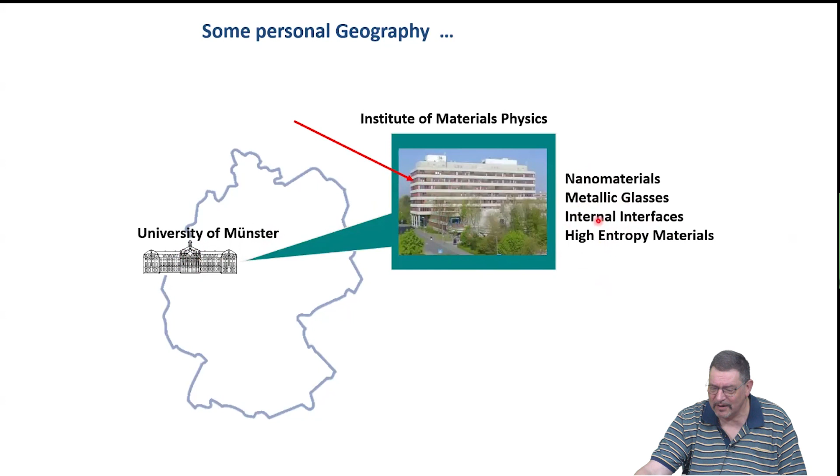And what we do is we are interested in nanomaterials, metallic glasses, internal interfaces, obviously high entropy materials, and then also internal interfaces in high entropy materials. And we also are part of the Center of Nanotechnology, a separate building where we do surface nanostructuring. Also partly related to these materials here, but partly also related to other topics like sensing or light harvesting, which we also do in my group.

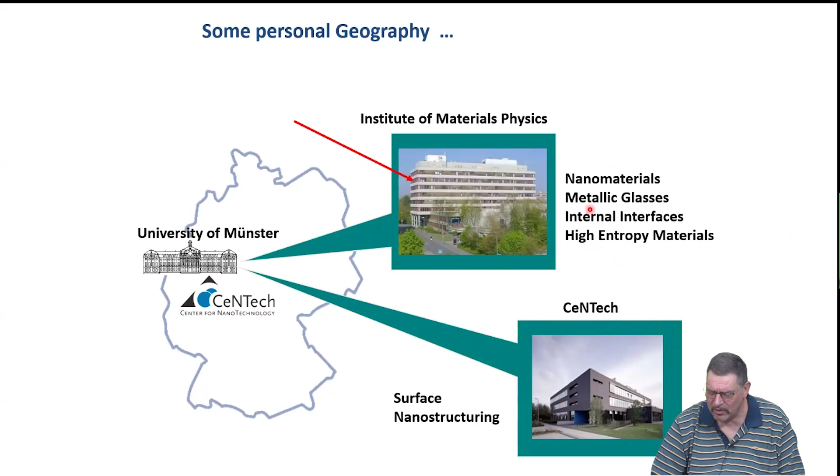And you could ask, how is this possible? Who pays for it? And nicely, the Beilstein Institute, which is a charity foundation founded 60, 70 years ago by the German chemical industries as well as the Max Planck Society, has put down money at that time. This is still kept, and from the interest of this money, the whole publication thing works. And yes, I think we were one of the first doing diamond open access so that nobody really has to pay.

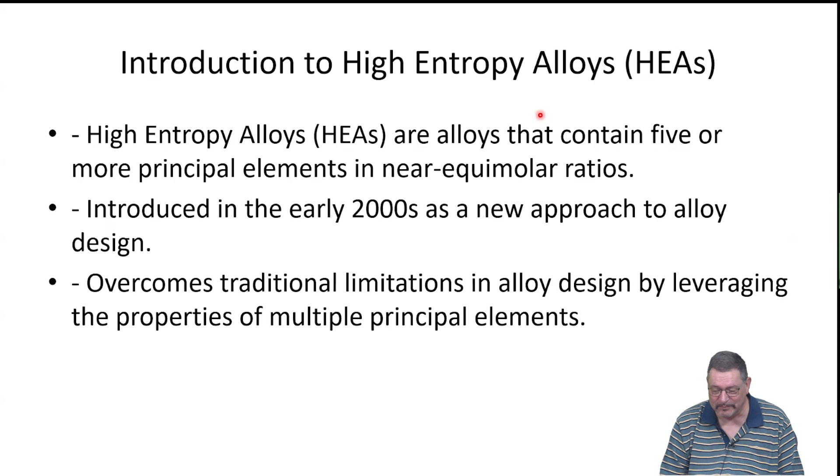But there were early concepts and ideas, and normally people say that in the 1950s to 90s precursor ideas were formulated. They started with binary, ternary, quaternary alloys. Most importantly, the theoretical groundwork for multi-component systems was established, and this has gone into CALPHAD, right? This is what people mean by that.

It was not a systematic approach, so we don't call it science what he did as of today, but these ideas were around for quite a long time. Challenges are you can hardly predict phase stability without a computer, and also mechanical properties would be very difficult to put, and the computational tools for high-dimensional phase diagrams were limited and still are limited.

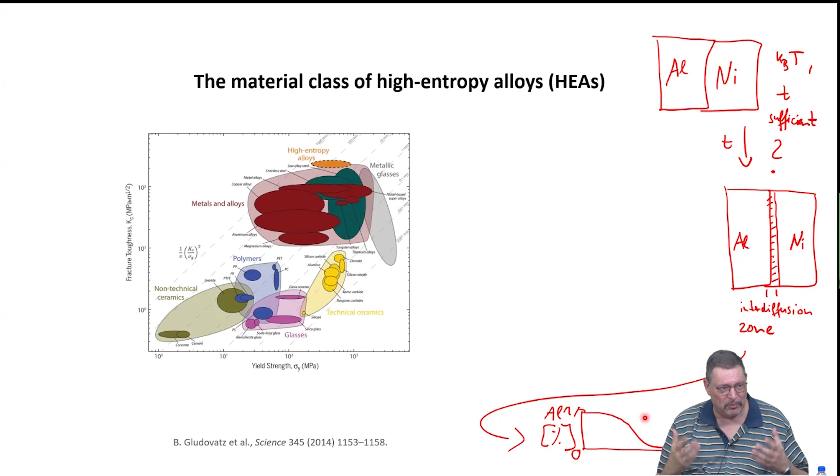So, microstructure of materials. I gather that all of you know about how to characterize, right? So you do optical microscopy or you do scanning electron microscopy, and you see different contrast arising from different optical properties, interactions, as well as different orientations. And I have to say, most of the high entropy systems have a microstructure that looks rather normal. So you have grains, grain boundaries. If you have two phases and you have a compositionally complex alloy, you have phase contrast, but there is not much more to it on this level.

We will see later on that if you go to the transmission electron microscopy level, TEM, things might be different, because the defects of the crystal structure, dislocations, twin boundaries, and so on, are normally found in higher abundance in metallic high entropy alloys than in conventional alloys. So these systems can retain high defect densities to much higher temperatures over longer times. And this is giving you an additional set screw, because normally we use defects to engineer materials properties, right? And this is exactly what is happening here, even though it is not really recognized in the literature. So they can store defects much better than conventional materials.

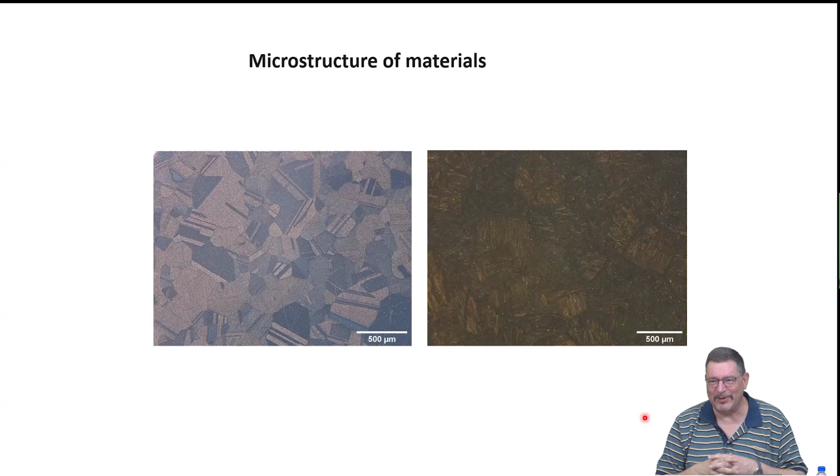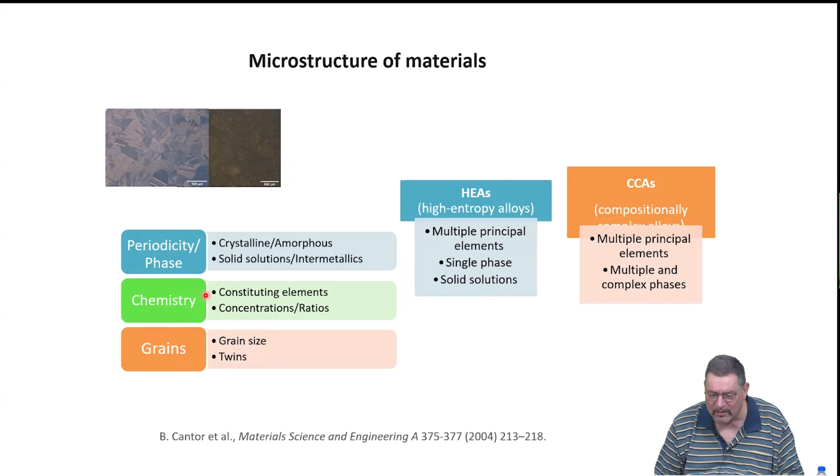Obviously, when we think of microstructures, we have to think of not only the phases that are visible, but also look at defects, as we just discussed, and then also chemistry. And chemistry is what has mostly been discussed: which compositions can we really use to make these high entropy systems? And I'm using high entropy systems now as a term for all these materials, whether they are compositionally complex systems with more than one phase or high entropy systems, just to keep it simple. But as you know, the distinction is there.

In 2004, the high entropy alloy concept was really born, and it was pioneered by our colleague from Taiwan, Professor Yeh. He also published the first really landmark paper, which is very highly cited, on high entropy stabilizing the single phase solid solution. Let me just see if you guys still remember the basic thermodynamics which you were taught. What do they mean with this term high entropy? Or where does the entropy come from? Excuse me? Yes, very good. Are there different types of entropy? Magnetic, electronic, there's all kinds of entropies. They are just talking about configuration, right?

Very good. Why is high entropy, and also high configurational entropy, stabilizing a single phase solid solution? Exactly, right? Because we have this term, and this rules, right? So if we want to have a low Gibbs free energy, then it is helpful to have a high entropy term, and the configurational entropy is part of the entropy term. And so if you increase that, then you decrease G. And so in this competition between different phases that can be stable, the solid solution phase has an advantage if there is a high configurational entropy. And then it was shown that high entropy favors simple solid solutions.

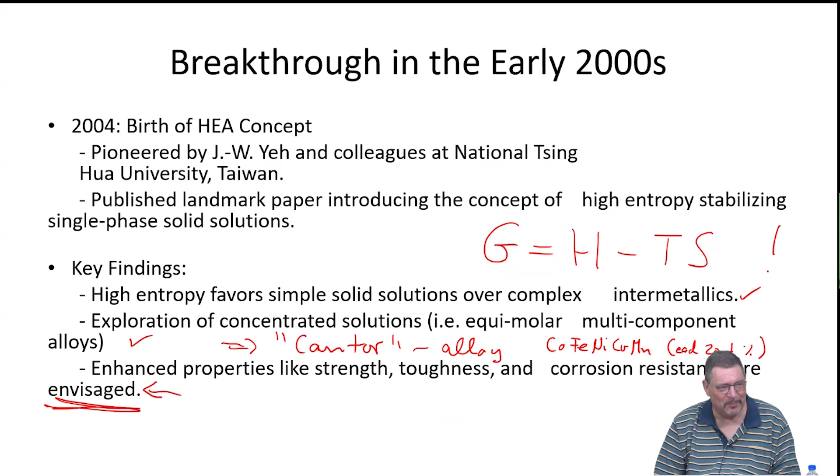All these enhanced properties are suggested. We don't know yet in many cases if they are there. So a lot of research by young people needs to be done in order to find out. Yeah, this is really the concept, right? We have different elements, and this also already shows you that you have to now think of something like

how to display phase equilibria, because from binary systems we are used to having a sheet of paper, A, B, and then you see the phase diagram. For ternaries we get different cuts through the prism, which is the phase diagram, but going to a higher and higher number of constituents, it gets more and more complex, and we don't want to walk around carrying some object.

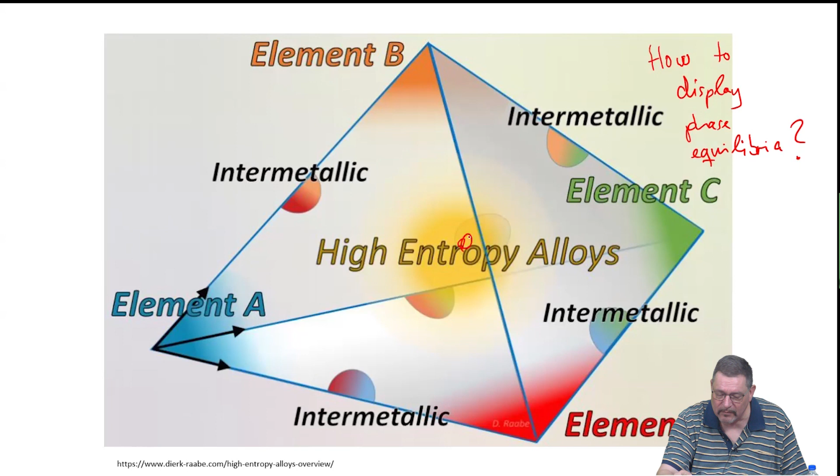So we have to think of, and this we do down the road, how to really design concepts to show phase equilibria with multiple constituents and maybe also more than one phase present at certain temperatures, compositions, maybe even pressures. The point is really that we go here to the center of the multidimensional phase diagram with our approach.

You could see it's a single phase solid solution, and it has these very good properties. I would say actually it still has probably better properties than many of the high entropy derivatives adding more elements, because the cobalt, chromium, nickel, or the iron, cobalt, chromium, nickel, the quaternary without the manganese, is a fantastic engineering alloy. It has really very high fracture toughness, very high strength, and it has a microstructure you can design at will, almost.

So it means that if one thinks about the properties in terms of real world applications, I would say skip the manganese, right? Use this multi-principal element approach, but I would say the high entropy concept is not more important than looking really at performance properties, cost, value, lifetime, cycle lifetime. And so this is something one also needs to keep in mind.

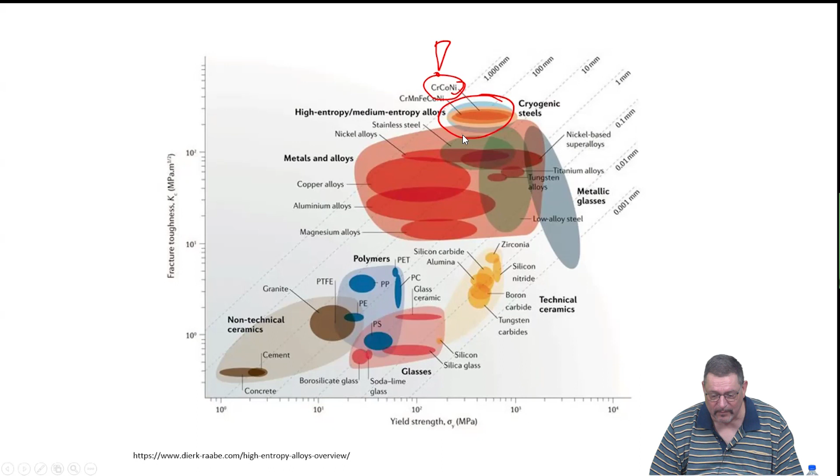It's nice to have this new paradigm of how to make materials, but one should not be blind and say, oh, it must be 5 or more components. If 4 is enough, it's better. It saves money, it saves time, you know more what you do. And this 4-component system really is a fantastic engineering material. Yeah, and then you know that you have to basically think of many materials which have been done over the years.

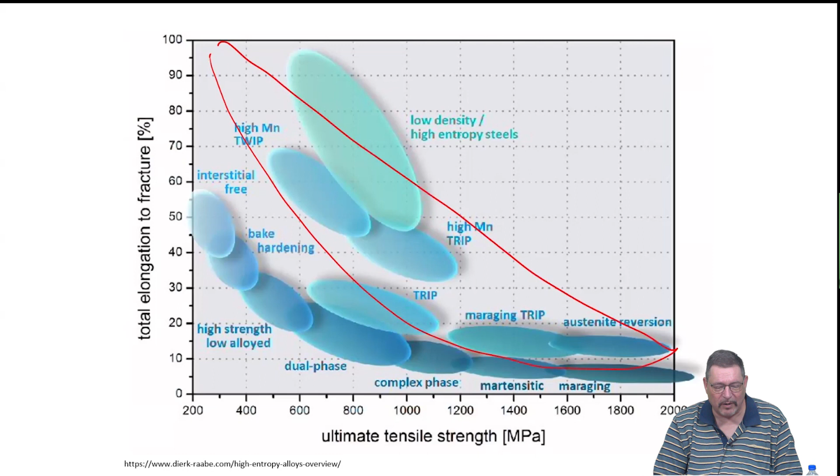As I said, steel is a very good material, right? So you get very high ultimate tensile strength materials, and total elongation to fracture always follows what is called the banana curve. So if you want to have a very high strength, you probably have to compromise with elongation to fracture and vice versa. And obviously, the Holy Grail is going in this direction, right? So you want to really expand into the region where high strength and high elongation to fracture is happening.

And in some cases you can see that high entropy systems, for example, also steels with a high number of constituents, they all have a high number of constituents, but a high number of constituents at rather high molar fractions can do the trick. So I would call them, in parentheses, high entropy steels.

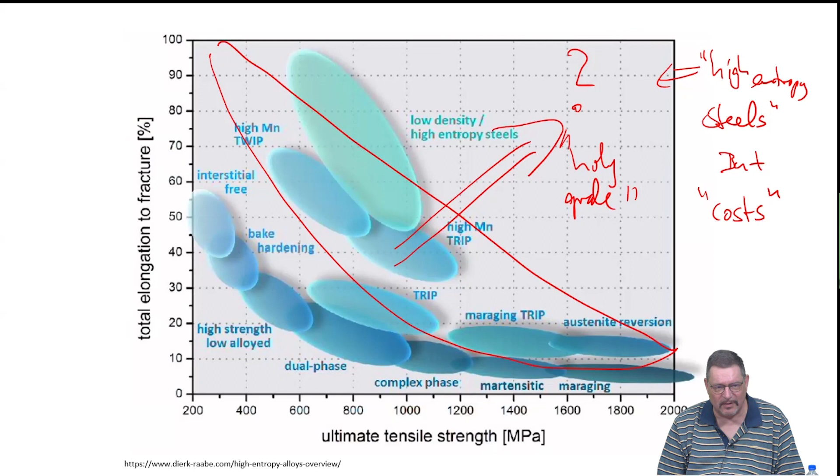They are not following really the definition of equimolar constituents, but some number of components have high ratios. But costs. I mean, steel needs to be cheap in industry. This is number 1, 2, and 3 priorities. And so once you add cobalt or nickel or vanadium or so, you're out. So nice concept, but in reality and practice, it's not feasible, because industry will not be able to cope.

So this is obviously high configurational entropy, which promotes formation of solid solutions over intermetallic phases. I would question mark this. Why do I question mark this? Because intermetallic phases often have very high enthalpies of formation. And so you need to have a very large term, T temperature times S entropy, to beat the formation enthalpy of intermetallic phases. Temperature is limited by the melting temperature, so you cannot go higher than the melting temperature, then you will not have a crystalline phase.

And configurational entropy is limited by how many constituents you can mix at rather equal proportion. At some point you run out of elements, so it's maybe 6 or 7 or 8, but then you will probably precipitate out a second phase, and then you can no longer calculate the mixing entropy in the same way if you have a new phase. Then you have to do it for each phase separately, so the entropy will go down. One thing I wanted to say, I forgot now.

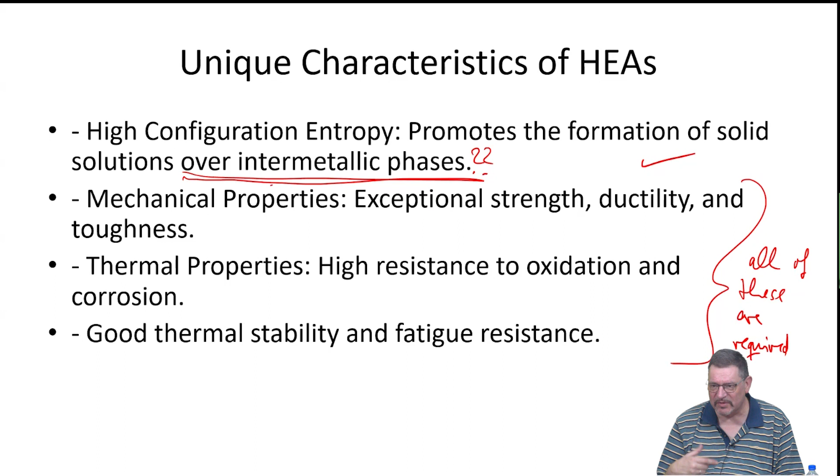And this is, I think, where high entropy systems are currently at in terms of the state of research, that you can really now start doing research on finding appropriate materials which can be called engineering materials so that they can be applied. Because so far most of the literature was really on basic knowledge about how processes work in high entropy systems as compared to conventional alloys.

When you think of it, lattice distortions is all you need, right? Because when you think of any material property, you can always break it down in terms of applying quantum mechanics to the distance of atoms and the strength of the interatomic interaction potential. Whether it's a magnetic property, electronic property, mechanical property, in the end, it will rely on how two atoms which are close together attract each other and repel each other if they come too close.

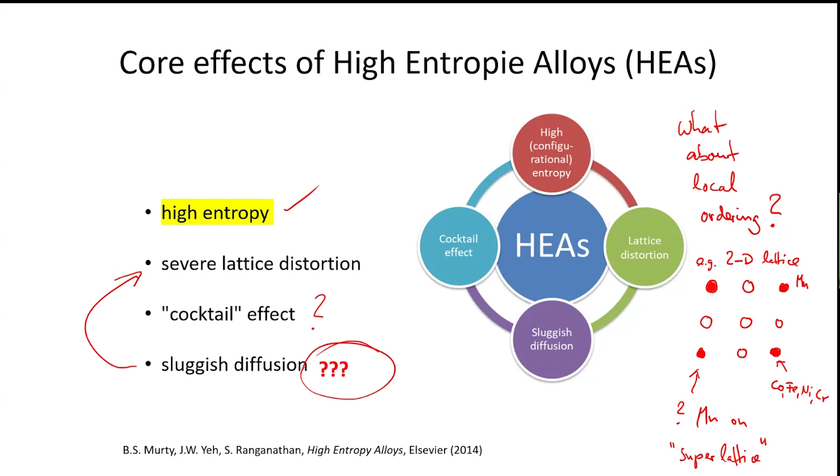Now this is going back to thermodynamics of alloys, and maybe you all know how in a binary system we would calculate the entropy for 2 different cases, mechanical mixture and a solid solution. Mechanical mixture is thinking of billiard balls. You have equally sized balls of different color, you mix them, and then it's basically just related to how many of the different colors you have. In real materials, when you mix atoms, you get a term which is not included in the mixing of billiard balls, from the interaction of atoms, because they have interaction potentials. And this is the mixing entropy term if you just look at the entropy.

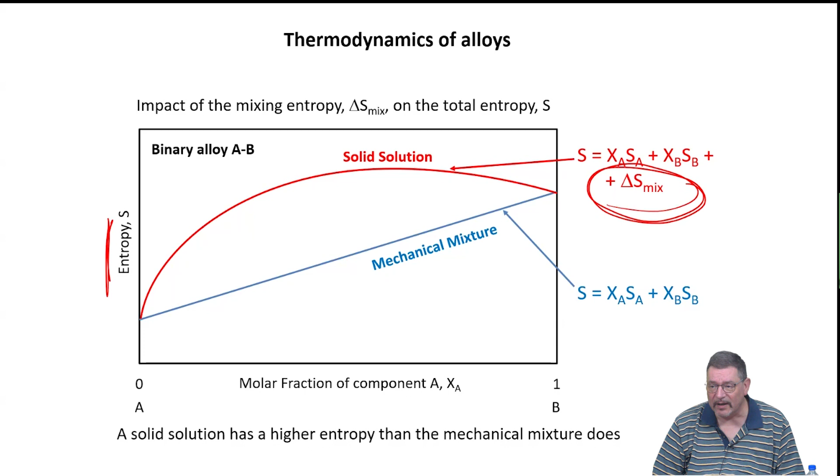Obviously, the solid solution has a higher entropy than the mechanical mixture does. And this is how it's calculated. We need to take into account different quantities if we mix a statistically significant number of atoms, because we have a significant number of atoms of A type, and they have the free enthalpy of the pure A state, the same for B, and then we have this important mixing term. And when we think of high entropy systems, we really do think of the mixing excess terms. Excess means excess over the mechanical mixture.

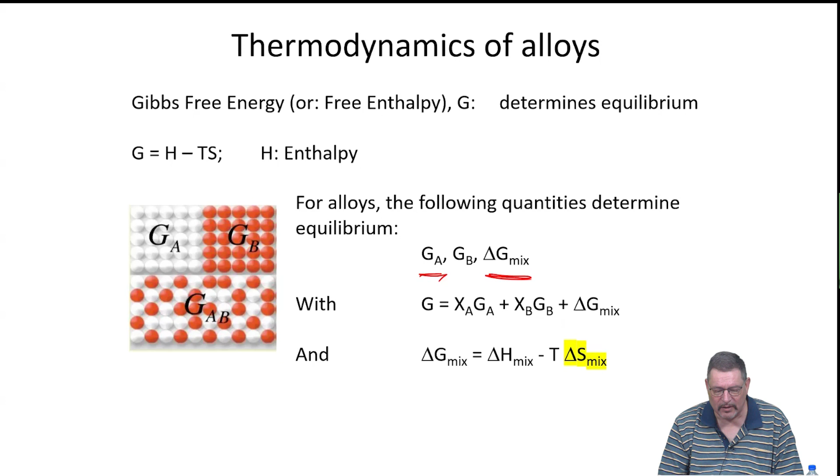And obviously, when we now mix the two quantities of A and B, we get a joint free enthalpy curve, a free enthalpy functional, which consists of the fractions of the pure states plus the mixing term, and the mixing term is this important part where the enthalpy of mixing and the entropy of mixing, the last one multiplied by the temperature, is entering the equation.

So it means when we want to have a solid solution, then we need to have a high mixing entropy term, and it helps to have also a high temperature, so they should be high. For having a solid solution, this should be low. Right.

And we always take into account, I think you all know this, that when we want to calculate phases, we do these calculations for equilibrium conditions. So it means we minimize the G functional in order to find the state that should exist at equilibrium.

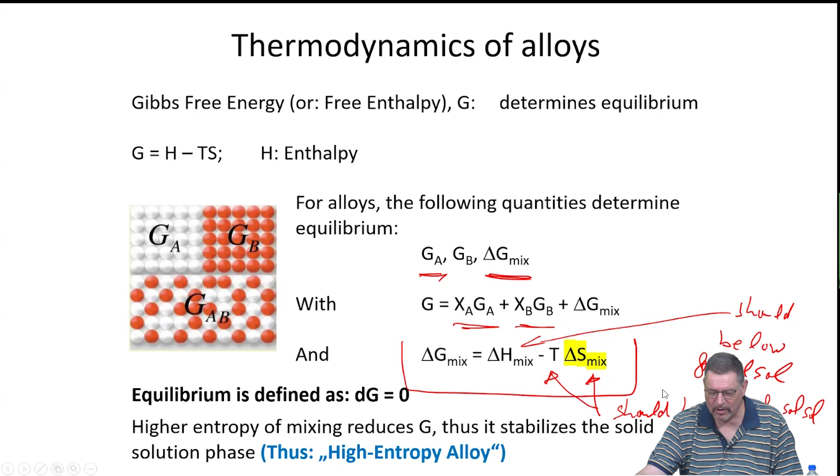Yeah, then just some things. Ooh, why is it not coming? So this is what I wanted to show. I don't know why it doesn't come.

So obviously, when we calculate the entropy, we have to think of this term, as I said, as consisting of multiple different entropies, and only one is controlled by how we mix different elements, right? This is the configurational entropy part. There is a magnetic entropy contribution, especially if we apply an external field, the same for electrical, and so on.

But for high entropy systems, when we design it and take the number of constituents as a design element, the configurational entropy is important, and we calculate it as the product of the gas constant multiplied with this summation term, which goes from 1 to the number of constituents: the molar fraction of each constituent times the natural logarithm of this molar fraction. This comes, as you know, from the Stirling approximation on statistical entropy.

Now, when we look at what is a high entropy, people in literature distinguish between low, medium, and high entropy alloys just by the numerical number. How large is this delta S conf term? If it's larger than 1.5 times the gas constant, then people call them high entropy systems or high entropy alloys. And when you look in the equation, you know that it's just the number of the constituents. So whether you put 2, 3, 4, 5 elements together. And if you have 5 or more, then this is more than 1.5 R, so then you are in the high entropy regime.

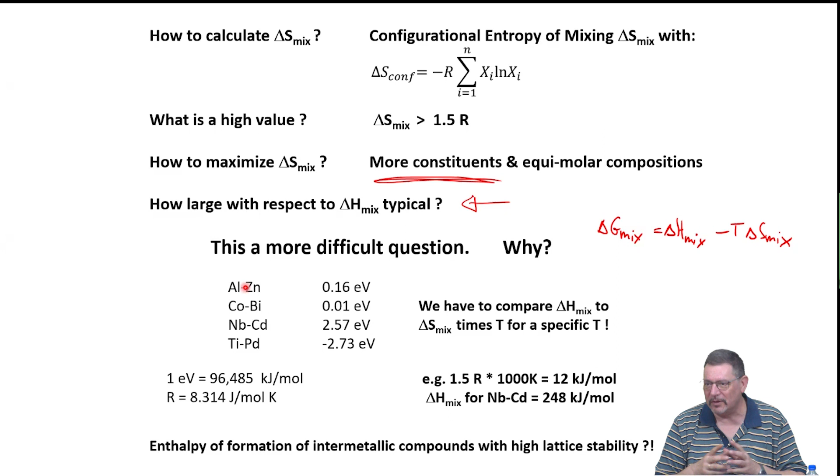Then obviously at some later stages people were making high entropy alloys already, and I think it's important to say that even early on people already found not only FCC but also BCC and HCP structures. We will talk in the course later, much later actually, also a little bit about intermetallic phases which have high entropy features, meaning that they have a more complex structure but still consist of 5 elements.

That's about it. When you look into the literature, there is not so much about high entropy materials or alloys which have more complex phases like tetragonal or triclinic crystal structures. So it's mostly densely packed. And this is again because mostly we're talking about metallic systems with rather equal properties of the constituents, and these systems tend to make densely packed structures, FCC, BCC, HCP. The more open structures are left for more covalent systems, or at least stronger covalent contributions to the binding energies.

There is, however, a complete field which is outside of what we cover, which are the high entropy oxides. For functional applications like battery materials and so on, these are, I think, highly investigated. And there you obviously have completely different crystal lattices because these are covalent systems where you have transition metal oxides and rare earth metal oxides which are combined to a functional high entropy material.

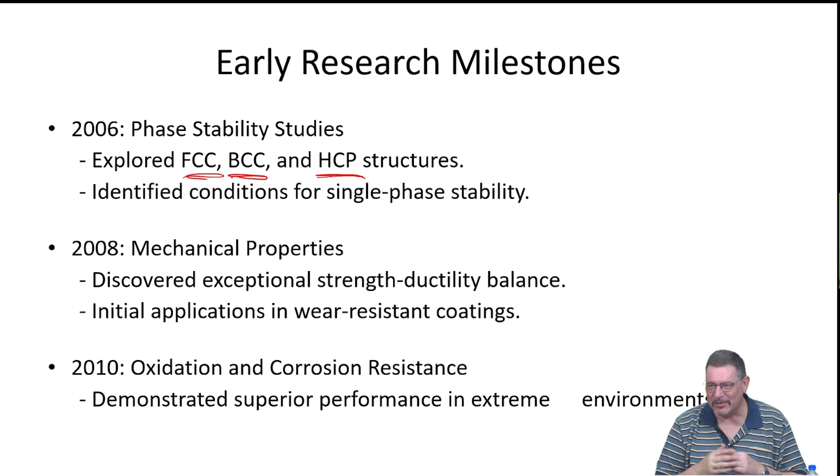This is something like the sluggish diffusion. First papers all showed, yes, sluggish diffusion is there, but they were not evaluating proper diffusion characteristics. And so one has to take it with a grain of salt and really do the thinking when reading, not believing everything. But you guys are all at the PhD level, so you know that you cannot believe everything that's printed and published. So one has to be careful about what to believe and what not.

Today, we are really using CALPHAD routinely, also for multiple constituent systems, and also density functional theory. As you see, many of the papers include theory and experiments. And what do you think, what is the largest set one can do DFT on? How many atoms can we really calculate in an almost ab initio way? Very good. Yes, 50, maybe 100 can also be done by somebody who has access to a very strong supercomputer.

If you think now about this, doesn't that worry you? It worries me a lot. How to introduce a dislocation? A grain boundary, a phase boundary with some faceting, some periodicity, which is maybe just 10 nanometers? Impossible, right? So we are still calculating basically on the scale of an elementary cell, maybe 10, I don't care, right? We have to really think when we read these papers. They are good, if they are done well, we learn a lot from them. I'm not criticizing them, but the method in itself still has restrictions.

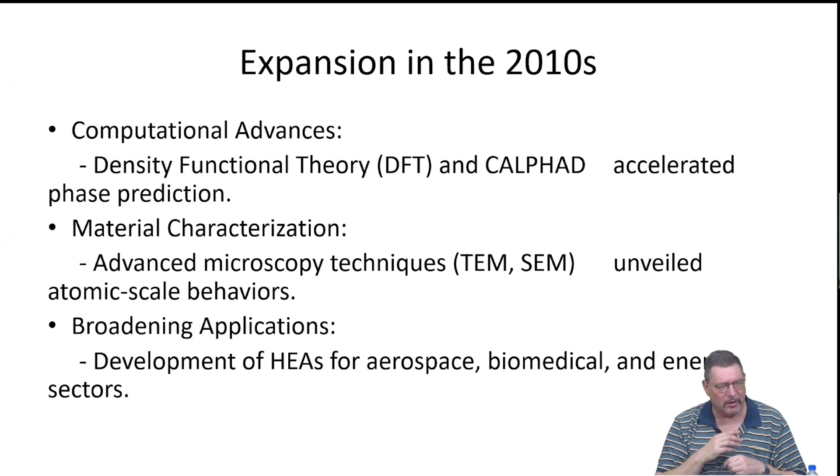Radiation resistance is a very strong research area right now in Europe, because of the high defect storage capacity I mentioned earlier. If you make this material sufficiently fine-grained, you can make it kind of self-healing or defect-resistant, not falling apart if you introduce large number densities of defects. If the number density gets higher, the defects are sufficiently mobile to find the next sink, probably a grain boundary or phase boundary. So you can pump in defects without violating the structural integrity of your material, up to a certain point. There's always a theoretical limit, but this seems much higher for high entropy materials than for conventional alloys. Often these are coatings, for example the first wall in a reactor, or beam stoppers in synchrotrons.

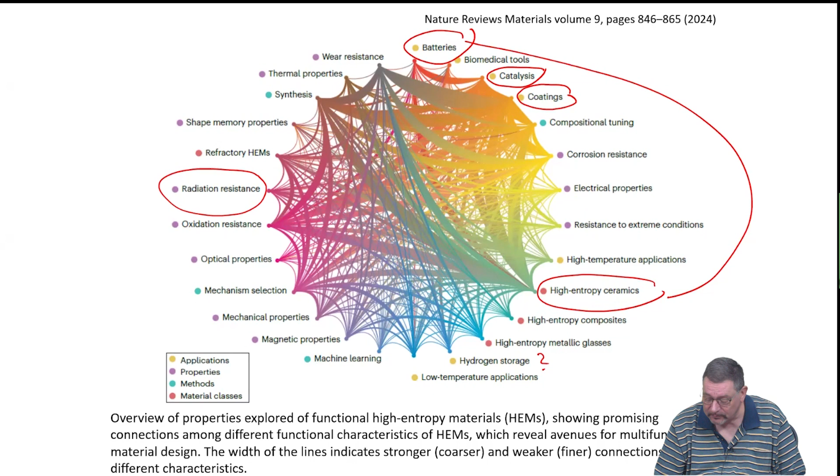Catalysis: you often use similar materials for battery materials as for catalytic materials. There again, the holy grail is to get rid of very noble metal constituents. So far it seems people could tune properties sufficiently without gold, platinum, rhodium, and so on, to get decent performances as well as stabilities in order to use these materials. And so this is, maybe I stop there, what I would see as key research trends.

In quantum materials, coatings for optical properties, tunable properties, and here tunable really means by design. So taking the same base material, let's say same constituents, but just change their composition. And in this range of multi-constituent materials, this is more easily possible, to have maybe a refractive index in a certain amount. So really go for performance and use this high entropy alloying concept, but then for non-metallic materials, mostly for the oxide materials.

This is a nice concept, hybrid high entropy alloys. I would say hybrid CCAs. So people are now thinking of making structural materials which can be applied by getting rid of expensive or very heavy constituents, taking a two-phase approach, going to CCAs, having two-phase materials, and add, for example, interstitial doping, like carbon as in steel, right? And so you can then much more fine-tune whether the carbon goes into interstitial sites of phase 1 or only of phase 2 or both.

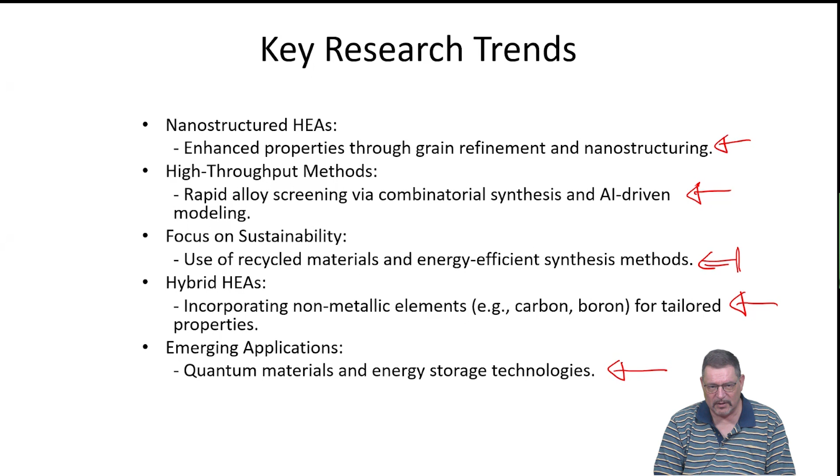Looking at the watch, I think it's now a good time for me to